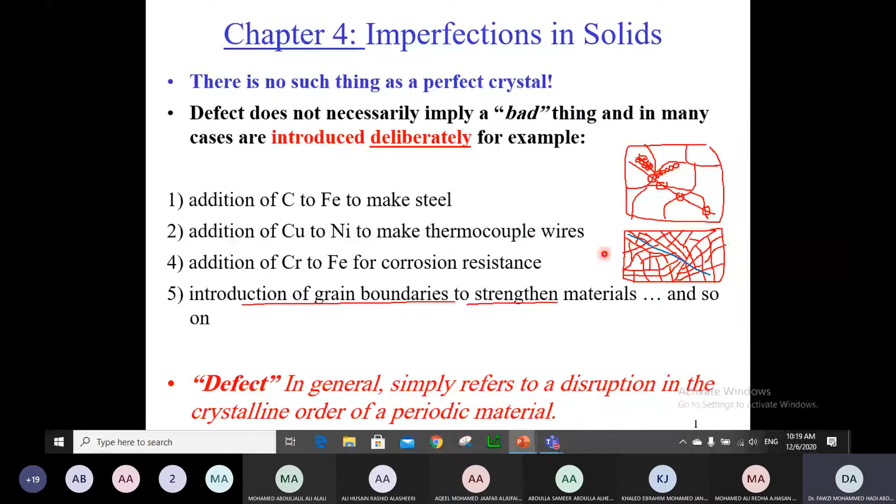Introduction of grain boundaries. Normally we can reduce or increase the grain boundary area in the material in order to control the strength of the material. And these grain boundaries are also imperfections in the material. So this is what we are doing. Defect in general simply refers to what? It refers to a disruption in the crystalline order of a periodic material. You have a disruption; grain boundary is one, of course. This is what imperfections of materials are.

Now we have several types of imperfections. We have the point imperfections, the line imperfections, and the area imperfections. These are the most important ones. Of course, we have others; at the end of the chapter, we will be looking at those as well. The point imperfections are like the vacancies, the interstitial atoms, and the substitutional atoms. This is an interstitial atom, which we are showing here. This is a substitutional atom. The vacancies we will show on the next slide.

And line defects, like the dislocations. Dislocations are examples of line defects. We will see them, of course. And the third type will be the area defects; examples of those are the grain boundaries.

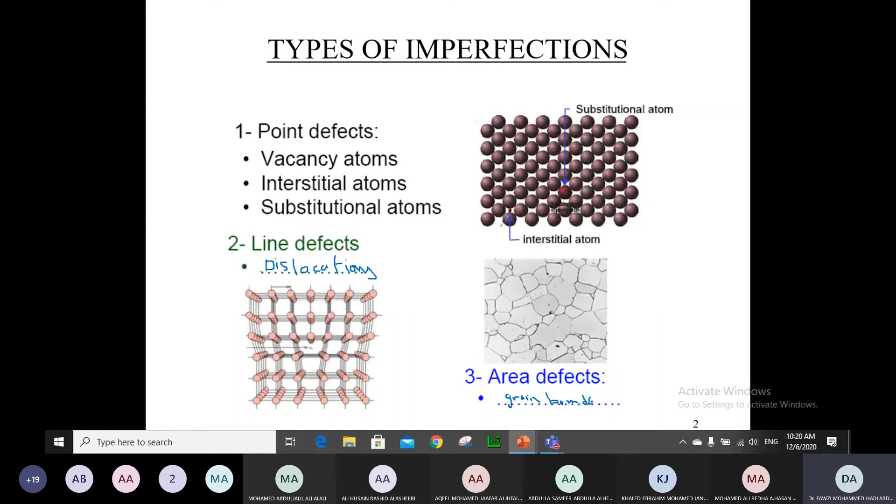You write it yourself. Okay.

Now to start with the first type, which are the point defects. We have the vacancies and the self-interstitials. What are the vacancies? In the material, you can see that you have a vacant atom in the lattice position. In this position, there should be an atom, but it is missing. This missing atom is called a vacancy.

All crystals contain some vacancies in them. You cannot have a material, solid crystal, without any vacancies. They will be always there. Now, what does that vacancy actually do to the material? That's important to know.

What it does is that it causes a kind of stress in the vicinity of this vacancy, as if you have a tension load here in the vicinity of the vacant atom. So that is number one, as if it is causing a tension load. In addition to that, it also causes a change in the behavior of the material.

How is that? Now, suppose the dislocation is here. Let's take this part, which is perfect, and suppose the dislocation wants to move in this direction. The material will be under a shear stress. So the movement of the atoms in this way or the other way is simple, and that is also a close-packed direction. These are touching one another. You don't have much of a problem here, so the dislocation moves normally.

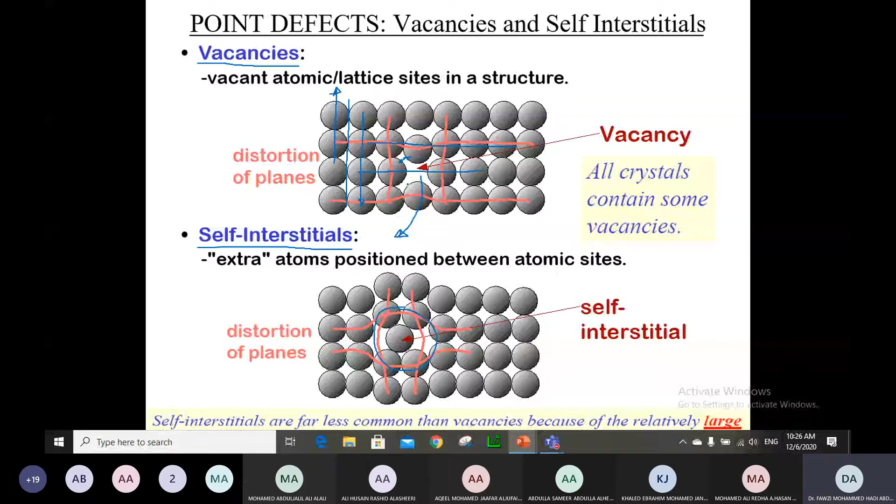The vacancies, as we already explained, require activation energy in order to form. Vacancies are also a function of the temperature of the material. You can see from this equation, the higher the temperature: N_V is equal to N_0 times exponential to the power with a negative sign, and you have the T here.

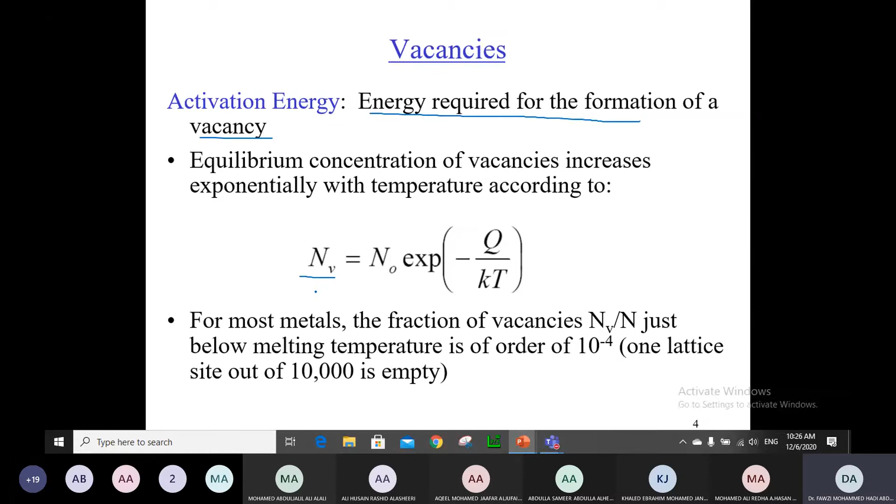So this means when you increase the temperature of the material, you have many more vacancies developing in the material. Why? Because when you raise the temperature, you give more energy to the atoms, basically, and they can move faster. So they have enough activation energy to move out.

Now, going back to impurities in solids, it is impossible to have 100% pure materials, basically. So that is when we are talking about point defects there. Addition of alloying elements is considered one of the impurities added. So impurity or foreign atoms are always present in the material. Even when we have 99.9999% pure material, still we will have 1 times 10 to the 22 to 1 times 10 to the 23 impurity atoms in every cubic meter of material.

In an alloy, as we have already said, the impurity atoms are added intentionally, deliberately added, in order to impart specific characteristics to the material, such as improved mechanical strength and corrosion resistance. These are just examples I'm citing here. Now, addition of those alloying elements, impurity atoms, whatever you want to call it, causes the formation of what we refer to as the solid solution. What is a solid solution?

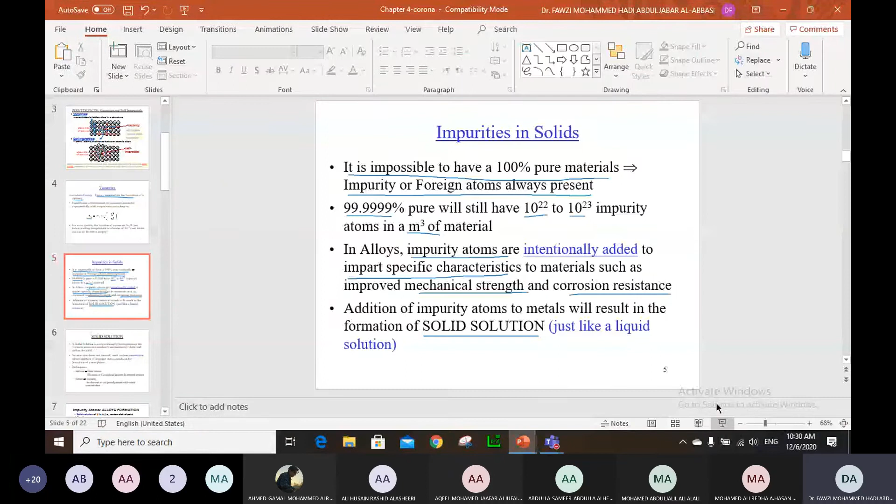So we said, what is a solid solution? Let us explain it in this way. A solid solution is a compositionally homogeneous solid material. Impurity atoms are randomly and uniformly dispersed in the material, randomly dispersed in the material. Just like a liquid solution, but in this case, we have a solid solution. What's the difference between a solid solution and a liquid solution?

Well, to make things easy, in a liquid solution, if you have, for example, water or tea that you're making, you add sugar to it. The sugar is going to dissolve. It will not show up; the particles become very, very small, they go between the molecules of water, and you cannot see them anymore. So the water can accommodate that amount of sugar. If you add more sugar, it's again going to dissolve.

If you add more of the sugar, it's going to dissolve up to a certain limit, a certain concentration. Then the water or the tea will not be able to accommodate the sugar in it. So it's going to precipitate at the bottom here. That concentration is what we refer to as the solubility limit of the liquid.

Now, for the solid, we have the same thing. Of course, the solid has to be in molten condition, molten meaning liquid, in order to mix the alloys together. You add the alloying elements to it, the impurity atoms are randomly and uniformly dispersed within it, and then they solidify. As they solidify, if they don't reach the solubility limit like with the sugar here, it is going to be a solid solution.

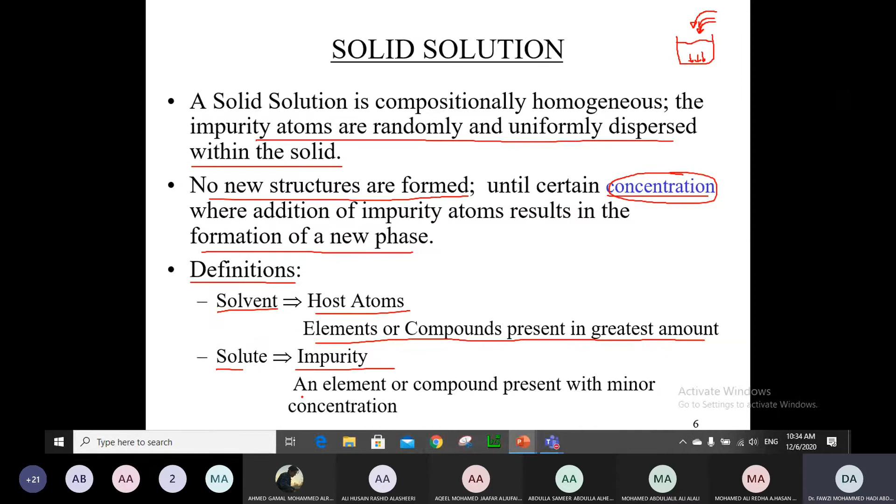Definitions are in the same way as we did for the solid solution. We have the solvent, which are the host atoms, يعني المضيف, elements or compounds present in the greatest amount, and the solutes are the impurity atoms, or the alloying elements if you want, which are the elements or compounds present in the minor quantities there.

We have basically two types of solid solution. We have substitutional solid solution, like in the case of copper and nickel. You have solid solution forming here because you did not exceed the solubility limit, the maximum concentration the material can handle. The mother material here can dissolve copper up to a certain limit. The nickel can accommodate copper atoms, but up to a certain limit.

Beyond that limit, it will form another phase, which we refer to as the second phase, which can develop in the material. This second phase has a different composition, and often a different crystal structure as well, and its behavior is also different from the rest of the material. So this is one type, the substitutional solid solution, and the other type we refer to as the interstitial solid solution.

Interstitial comes from the spaces between the atoms. You remember that for every crystal structure we calculated the atomic packing factor, so it's not 100% occupied. You have spaces between the atoms, and atoms can go into those interstitial spaces. This is an example, and this is another example. In this case, we have carbon in iron. Carbon is an interstitial atom which can develop an interstitial solid solution.

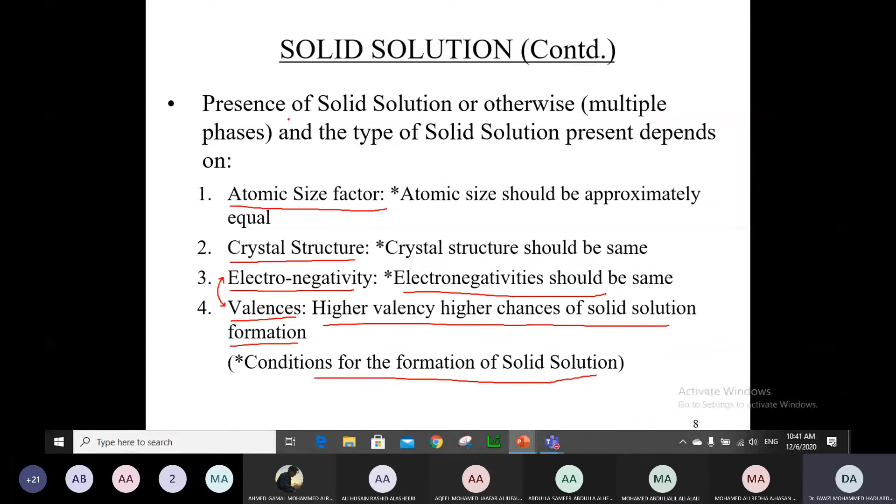Up until now we talked about the point imperfections. The second type of the imperfections are called the line defects. And what are the examples of line defects? The dislocations. Dislocations result from solidification of a melt. This is one way. When you are solidifying any melt, when we make it molten metal, then we solidify it, dislocations are going to form in the material.

Not only because of that, but also due to the mechanical working. Any mechanical working you perform on the material, such as rolling, drawing, compressive impact, tensile, or shear stresses, any straining, plastic deformation that you cause to the material, again, imperfections are going to form in the material. Or from thermal stresses, due to the heating of the material. Again, dislocations are going to form in the material.

It is very difficult to form a dislocation-free crystal. You cannot have any crystal without dislocations. So dislocations are inevitable. We already learned that dislocations make metals weaker than they should be. Why? Because the dislocation movement causes the slip in the material. Without the dislocations, the slip would not be possible, and therefore plastic deformation would be very difficult to happen as well. So the material will behave very hard and very stiff.

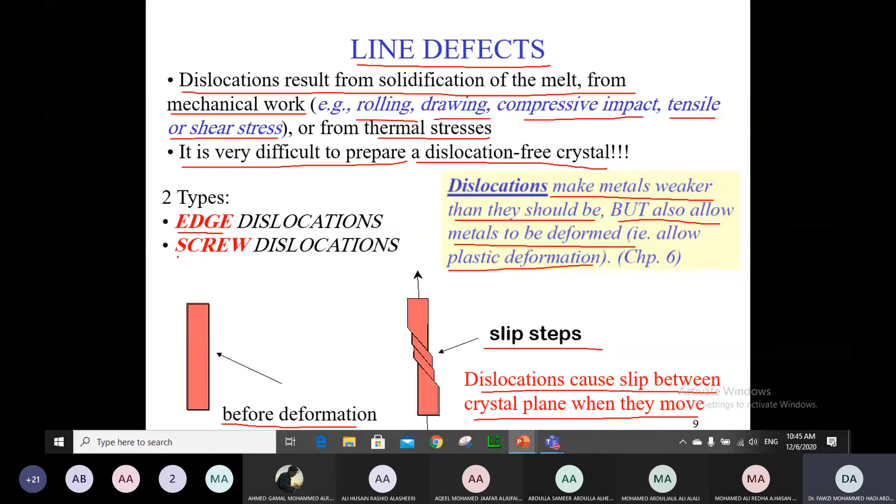So before deformation we are showing the material, and after deformation, the slip actually occurs in the material. The dislocation causes the slip between the crystal planes when they move, and therefore they allow plastic deformation to occur. Now, the dislocations are of two types. We have the edge dislocation and we have the screw dislocations.

Let's look at them. The edge dislocation, let me make this bigger, think of the dislocation as an extra plane, like in this one. Suppose this is not there, you are looking only at this. This is a perfect crystal, as you could see. But the imperfection is that there is half a plane, as you could see here, as if it is immersed in the material and is squeezed in the material.

This half plane is inserted within the crystal structure that you have here, which is causing an imperfection in the material. This is how an edge dislocation basically looks. Misalignment of atomic planes: as you can see, this is misaligned, and this is misaligned. This misalignment of a plane is caused by this extra half plane in the material. This is what we refer to as the edge dislocation.

The other type we refer to as the screw dislocation. It looks a bit different. Imagine you have the crystal perfect here, and then you cut in between half the plane all through, and then you move the position of one atom, one unit cell further down, and therefore the bonds which were between this and that are not there. It's between this and this, and between the one here and the rest.

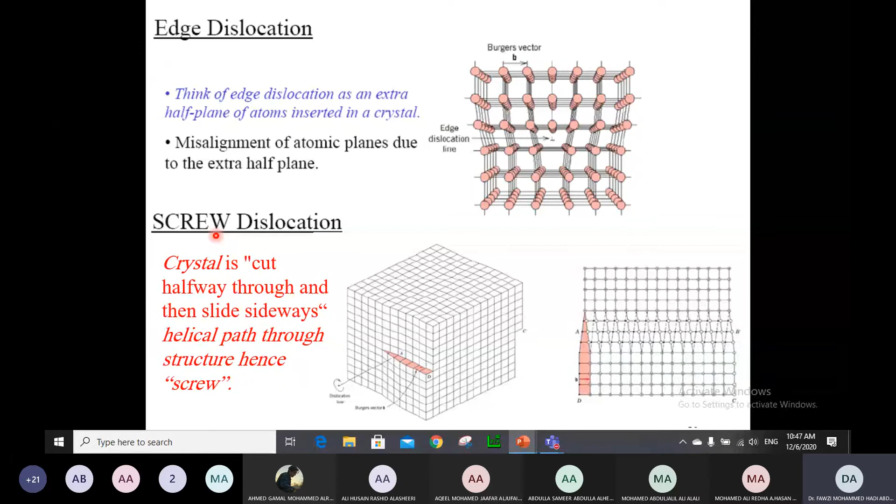So that actually is another type of imperfection happening in the material. The bonds move from one to the other as if you are screwing in the material like that, and that is why we call it a screw dislocation, from the way it looks. Now, this is what we refer to as line imperfections, which are the dislocations. We will use what we learned here next lecture to explain how and why plastic deformation happens, using the knowledge of the dislocation. But for now, let us continue with the other kinds of imperfections.

The last part are the area imperfections, like what happens in polycrystalline materials. Most materials are polycrystalline and are made from many single crystals, which we dealt with last chapter. So when we have a molten metal and we cool it down, due to the gradient of temperature across the material, the solid crystal nucleates in different positions at different orientations. This is why I'm saying during solidification, the solid crystals nucleate and grow from the liquid in random orientations.

They nucleate here, and then they grow in different orientations. Once they become bigger and bigger, the grains impinge against each other. So this is what I'm saying: the grains impinge on each other when the solidification is complete. The junctions between the grains are called the grain boundaries. This mismatch between one grain and the other in terms of atom orientation causes the development of the grain boundaries here.

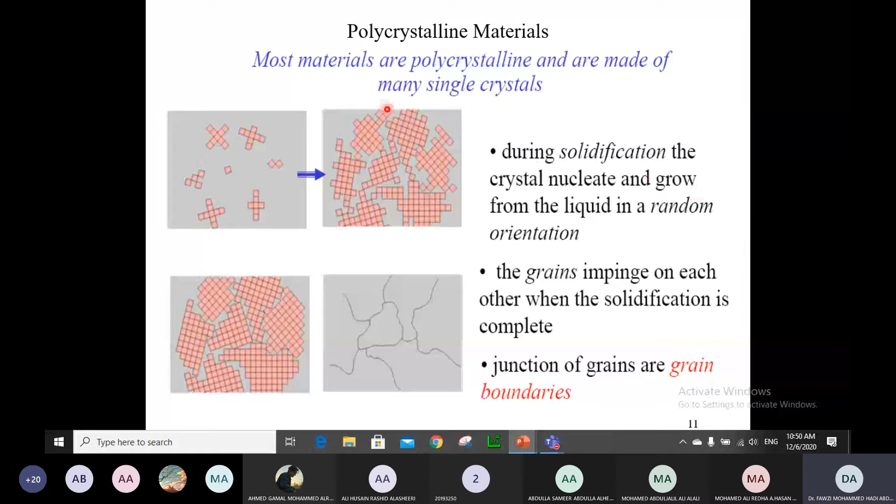One important thing to understand is that grain boundaries are imperfections. The atoms at the grain boundary, because of the mismatch between the grains, are less bonded. As you can see, you have more vacancies at the grain boundary as well. So atoms are less bonded, and atomic packing is lower than in the grain itself. We refer to that as low coordination.

So within the grain, the atoms are bonded perfectly, but at the grain boundary, the atoms are not well bonded, and you have vacancies in the material. So what does that result in? It results in a difference in energy between within the grain and the grain boundary. That is called the interfacial surface energy, or grain boundary energy, the interface between one grain and another.

The atoms in the grain boundary area are more energetic than the atoms within the grain. Why? Because the atoms within the grain are well bonded, while the atoms at the grain boundary are not well bonded. So they need to bond in order to be stable, so they are more energetic. This is why we say the energy at the grain boundary is higher than the energy within the grain. Grain boundaries are more chemically reactive in the case of solidification.

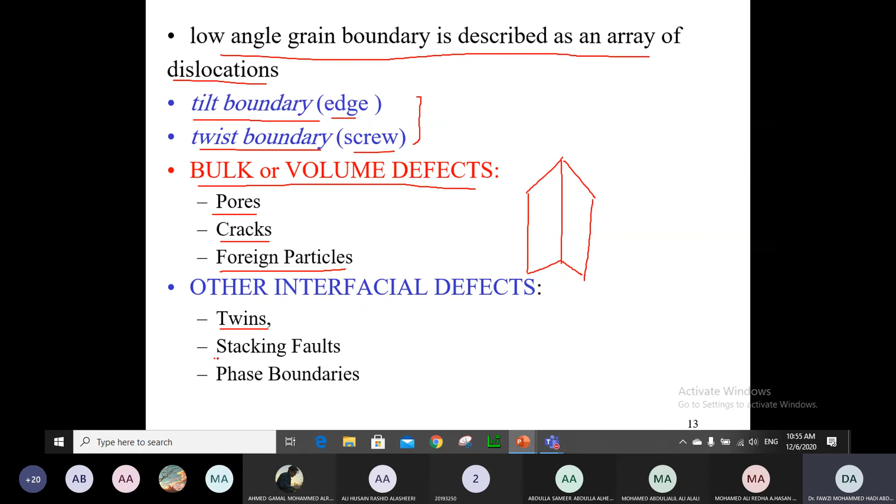We have something called twinning, like a twin happening in the crystal structure, like a mirror basically. The crystal structure goes like this and comes back like this. That is twinning, which is an imperfection. Stacking faults: remember in the FCC and HCP crystal structures, we said we have stacking faults. Like in the hexagonal close packed, we have A, B, A, B, and it continues in that way. This is called the stacking sequence. But you could have a fault there.

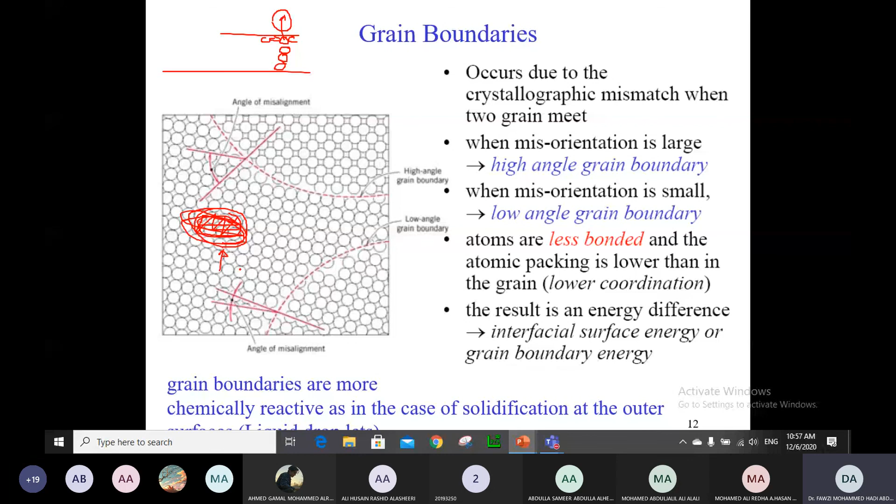Another last type of imperfection we refer to as phase boundaries. The grain boundaries are imperfections, of course, but you could have another phase forming in the material, a different phase with a different crystal structure. The boundary between this phase and the rest is called the second phase boundary. That second phase boundary, very similar to the grain boundary, plays a role in changing the crystal structure, and it is an imperfection in the material.